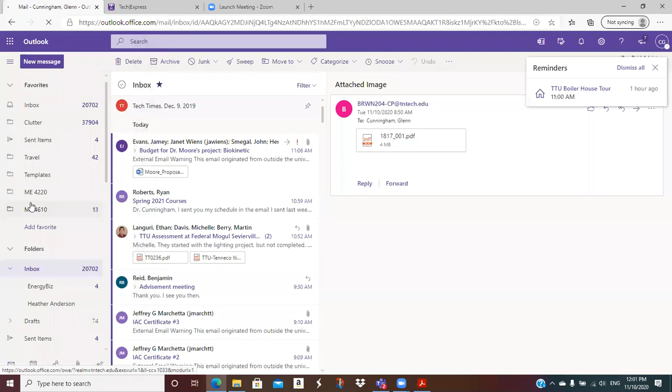You guys need to be working that homework, and I had a question whether I want it turned in. I think you probably should email me a solution file on that. I'll probably give everybody 100 that does a reasonable job. I mean, I've sent you the solution, so come on, how hard can it be? Just so I know you've touched it a little bit and looked at it.

I don't know, I'll take some feedback. I would think maybe the 19th might be a pretty good day for the pump test. It gives you a little bit of time to look at it. I mean, we could do the 17th. Does anybody have any strong preferences? Well, the longer you wait, the more you forget.

But I don't really care. I would say 17th or 19th is when we need to take that pump test. I like the 19th. Give me more time to study for it. Put it off later.

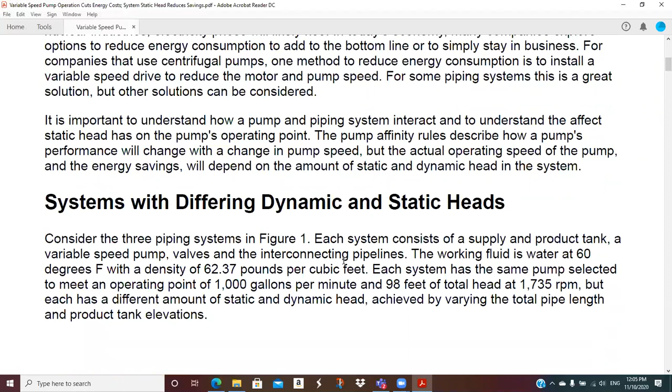But you have to incorporate the system curve to get a correct result.

He's got 3 piping systems here, figure 1. Each system consists of a supply and product tank, a variable speed pump, valves, and interconnecting pipelines. Working fluid is standard water, density 62.37 pounds per cubic foot. Each system has the same pump selected to meet an operating point of 1,000 GPM at 98 feet of total head at 1735 RPM.

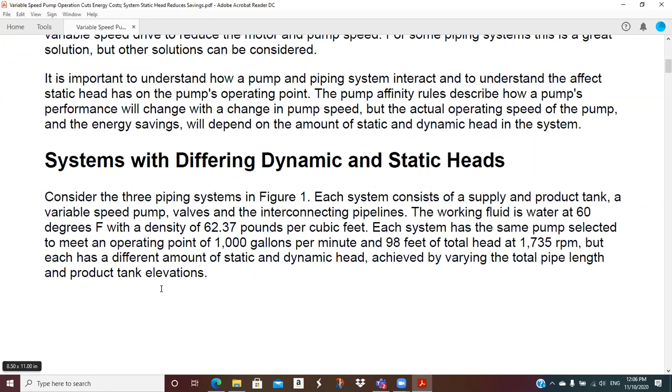But each has a different amount of static and dynamic head, achieved by varying the total pipe length and product tank elevations. So he's going to change the elevation of the tanks to adjust the static head and see the impact. I think we've kind of done this, but it's good to revisit.

System 1, system 2, system 3. System 1 is all frictional, that's all dynamic head, no static, all friction. You achieve that by having these 2 tanks that are exactly the same elevation and the same level, and no gas, same gas overpressure, which probably means they're just open to atmosphere.

So we see supply tank 1, level 20 feet, elevation 0. Product tank 1, level 20 feet, elevation 0. So VFD 1, 1,000 GPM, total developed head, TDH some people call it, 98.56, at 1735 RPM. So that's with a VFD probably on 60 hertz.

And the supply pressure is 3.271 PSIG, and the discharge pressure is 45.94. Let me get my calculator.

Just for the heck of it, if you take 45.94 minus 3.271, you get 42.669. If you multiply that by 2.31, you get 98.56. So see, that's the total head, it's just pressure.

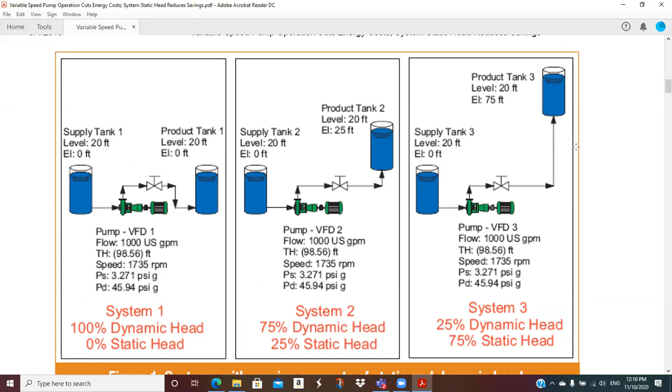That represents, of the head produced by the pump in system 2, it's roughly 25% static, because our static head is 25 divided by the total head of almost 99. That's roughly 25%, which means the rest of it has to be frictional head.

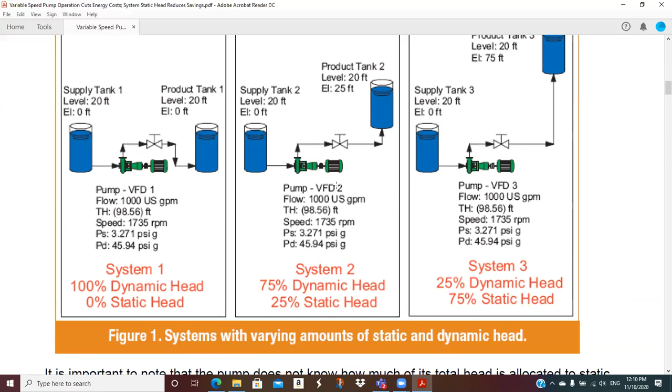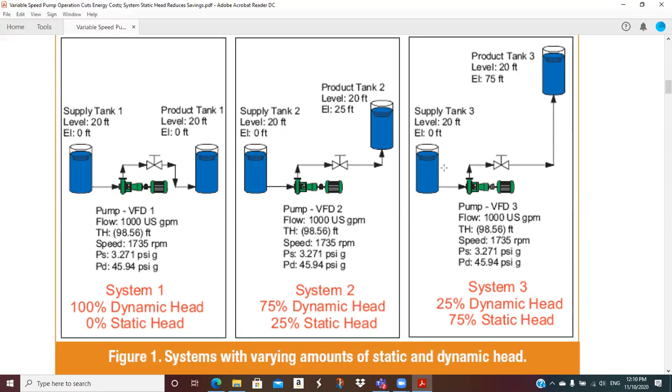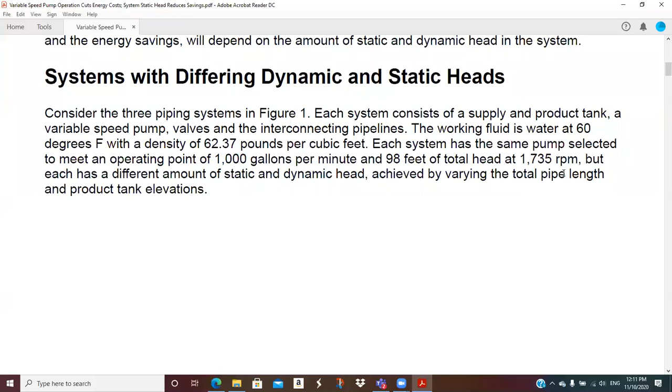And then in the third case, we've got this tank 75 feet in the air, and the levels are both 20 feet. So we say that this is 75% static and 25% dynamic head, still producing the same total head for the system. Remember, he's changing some of the pipe sizes, achieved by varying the total pipe length and product elevation, so there's some piping length changes.

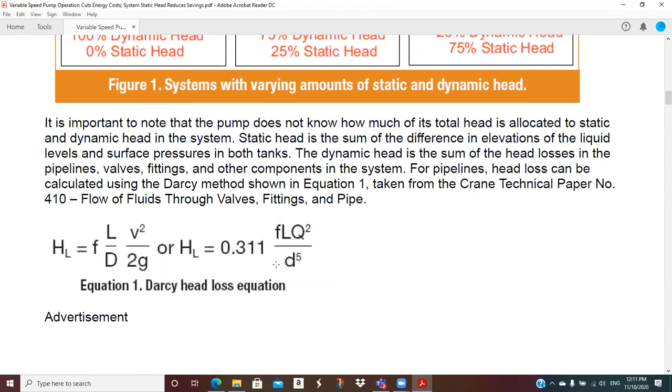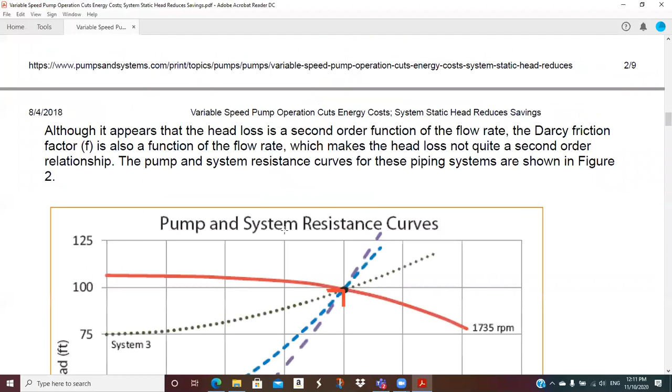Okay, let me make this a little smaller.

So when we plot it up, we've seen this kind of thing before. You got system 1, system 2, system 3, from 0 static to not much friction and a lot of static in between those systems. I think everybody should be good with looking at those curves.

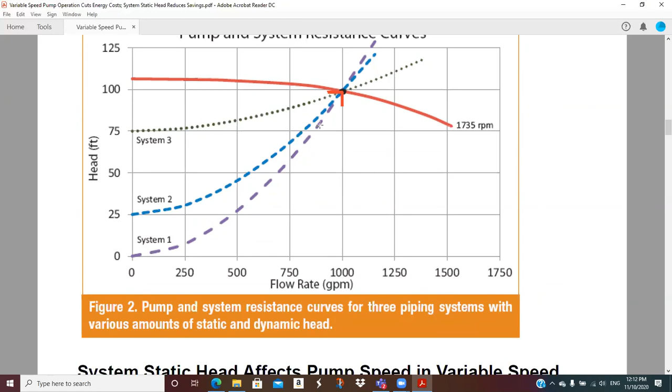Also, system static head affects pump speed in variable speed applications. So these are the affinity laws, and we know we use those to simply adjust the pump curve for different operating speeds. And wherever they cross, if you slow that pump curve, it's going to fall down through here. These three systems are going to operate at the intersection of that system curve and that pump curve at different speeds.

So using the affinity rules to reduce the flow rate by 50%, this just shows how you do it. Remember, this is the affinity law. So this would tell you, he says, okay, he wants to cut the flow rate in half.

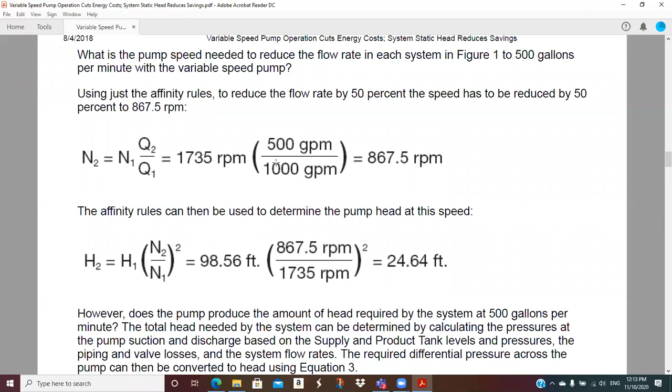If you want to take this point and translate it to the 50% flow from 1,000, then you can do the math like this. So then the RPM would be half of that, and the head then would be 24.64, okay?

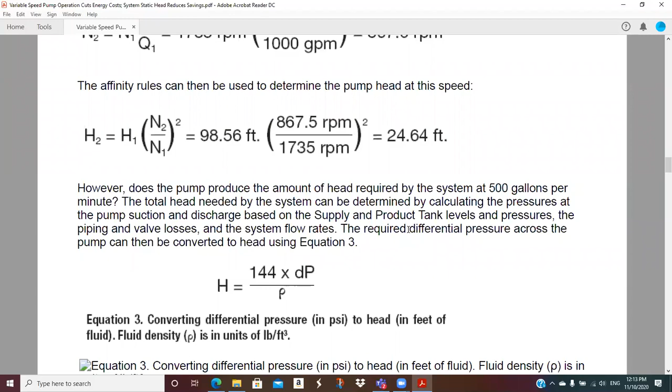So, it's been a little while since I've looked at this. Okay, so now we're going to show the three systems again.

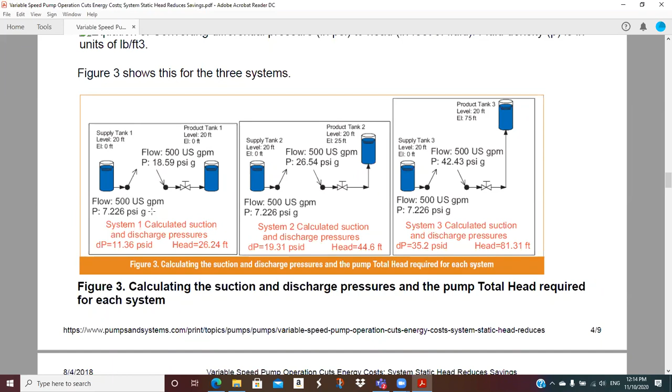So what are we doing here? Flow 500 GPM, so we've got a pressure of 18.59. And on this side, we've got 7.226. So calculated suction and discharge pressures give a head of 26.

Okay, for this system, basically he's saying, for these systems at 50% flow, what would they require? Well, at 50% flow, one of them is going to require here, the second one's here, and the third one is going to require clear up here.

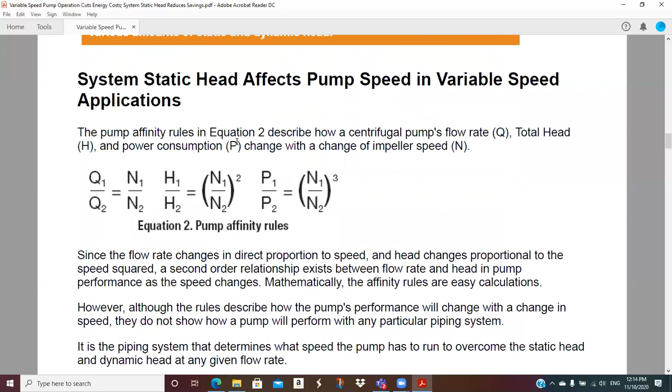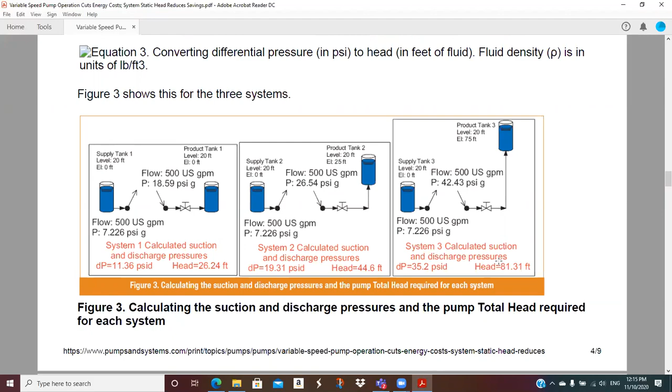So number 2 is going to require almost 45 feet of head, and number 3 is going to require almost 81 feet of head. Okay, and so you can't just blindly cut this speed in half

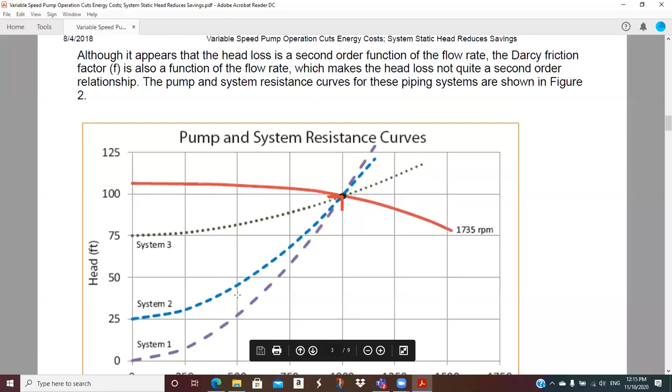and expect that that's where all three of these systems are going to operate. If I cut this speed in half, this curve is going to shrink down through here, and it's going to go through roughly, well, this point shrunk down to about 25 feet of head. So the all frictional system is going to work pretty much. So that curve is going to be way down here.

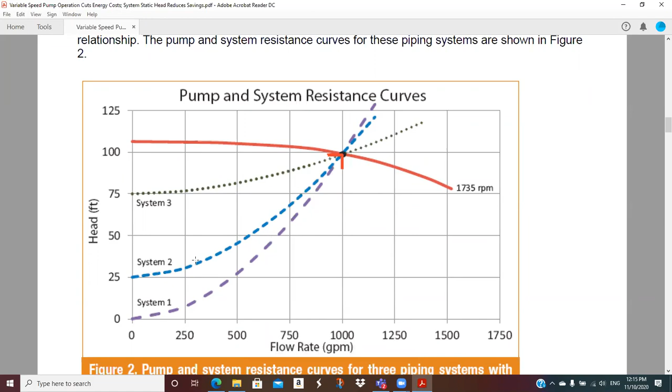With 50% speed, this system would produce flow back here someplace, and this system wouldn't produce any flow. That's what he's kind of trying to get to.

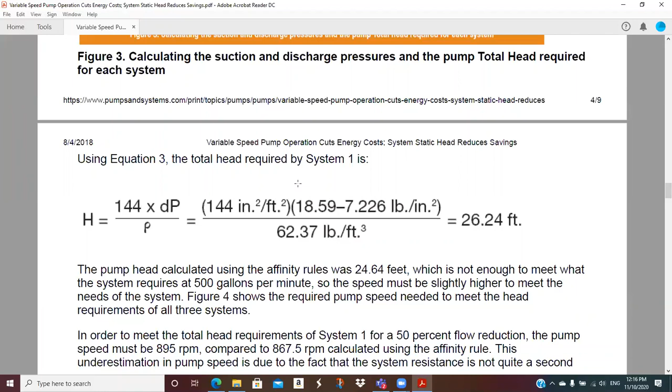Okay, calculating total head required. So this is showing he's just showing the calculation. This is 2.31 times the differential pressure, so 26 feet.

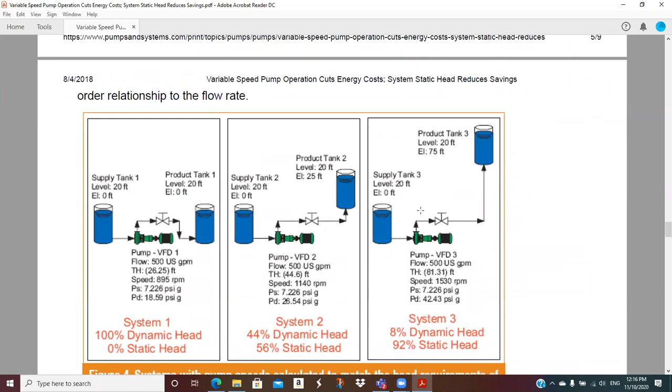Okay, system pump speeds calculated to match the head requirements of each system. Okay, so this guy, pump VFD speed, okay. So this one can operate at 895 and be on the curve.

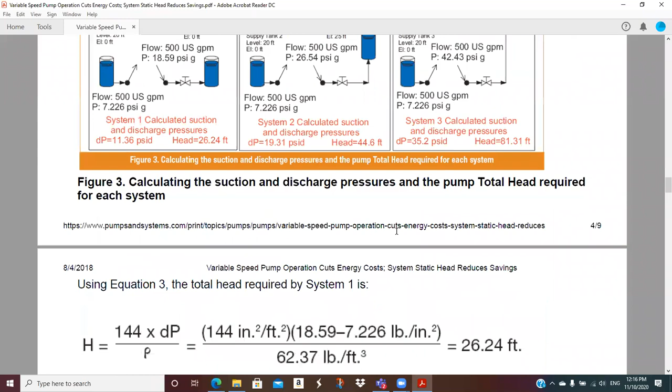So let's see up here, when we cut this speed in half, say this is 867, it's pretty close. 867 got us about 24.6 feet. Well, it's got to be a little faster because I need 26.25 feet. So we had to speed it up a little bit for system one, but it's pretty close. So the all frictional follows the speed relation pretty well.

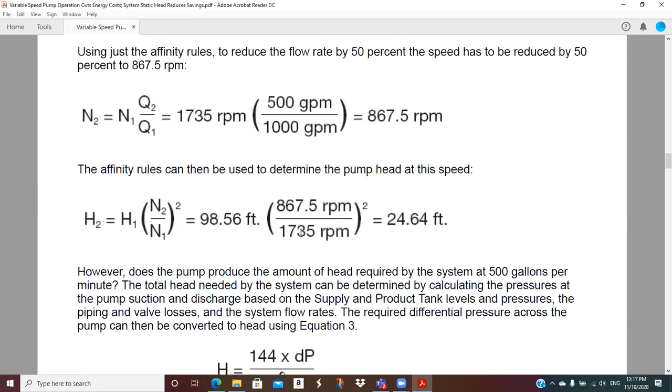For this system, at this operating point, we're 56% static and 44% dynamic. We need a speed of 1140 RPM, we put the pump curve through this point. That's what we're doing. He's calculated the RPM required to put the pump curve through this point because he wants 50% flow.

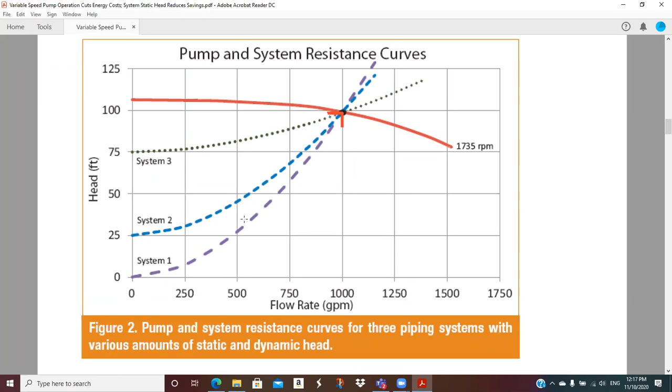And so this one's going to be up in the 80s, so it's not going to get slowed down very much at all. 1530 RPM in order to get us the 81.31 feet of head that system requires at 500 GPM.

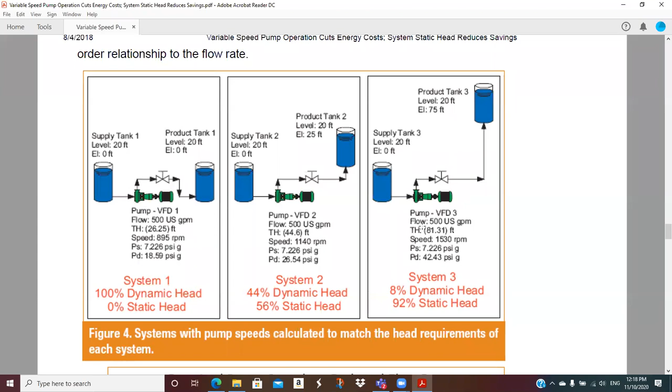So there you go. There's his analysis. And so what you do is you plot these system curves, you get in Excel, and you figure out what flow you want, and then you can do it trial and error. You just put in the different RPMs, and this curve jumps.

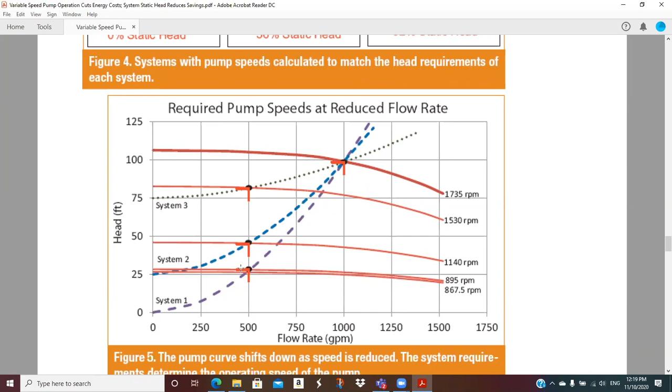And notice the affinity law, if I just translate the points to 50% speed, I get this curve. And so that curve really doesn't go through any one of the 3 points. And that's the point of the article, is you can't just use the affinity laws.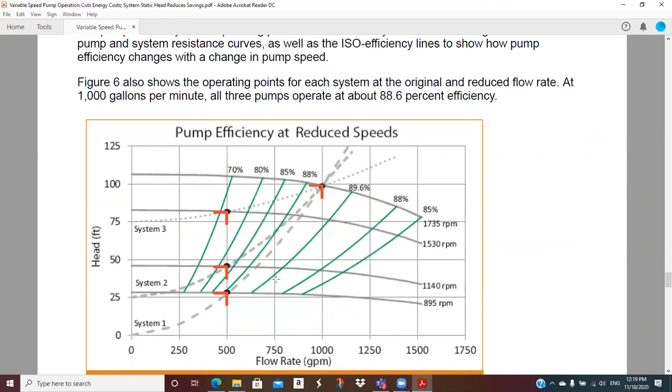And so then the other thing you have to, if you want to calculate the operating cost, you have to determine, well, what's the pump efficiency going to be at the reduced speed? And so you can see for different RPMs, different efficiencies.

So you're over here at like 89% efficiency, but with this static system, when I slow this thing down, I'm going to be just a little over 70, so maybe 73, 74% efficient. When I do it on this second curve,

I'm going to be better, about 83%. And on the all frictional curve, it's pretty much the same. I'm going to be 88, 89%. So that has to be taken into consideration.

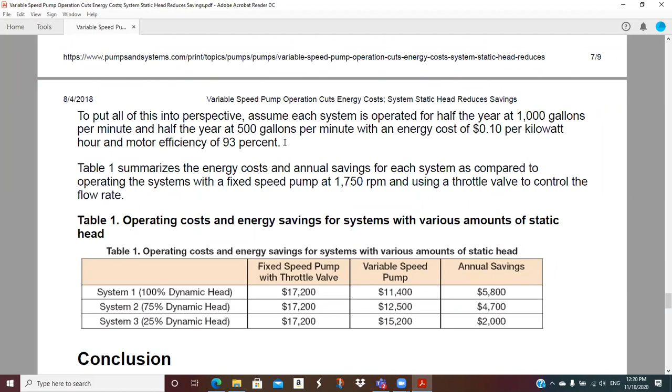So let's see, operating costs vary with different amounts of static head. Fixed speed pump with throttle valve.

So for system one, variable speed, annual savings. If instead of using speed control I just throttled the flow on the all-frictional system, it would cost the same, $17,200. With variable speed operation, it would drop to $11,400. Savings of $5,800 for putting in a variable speed drive.

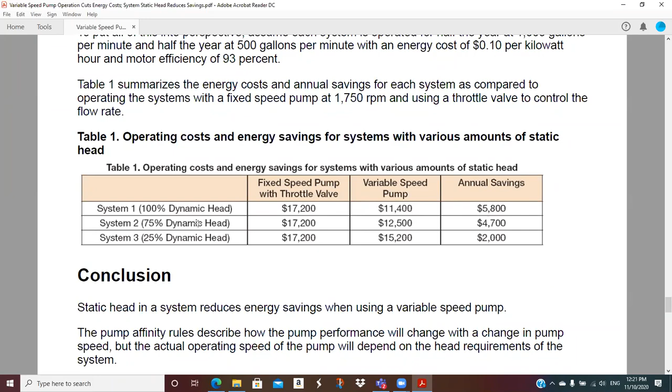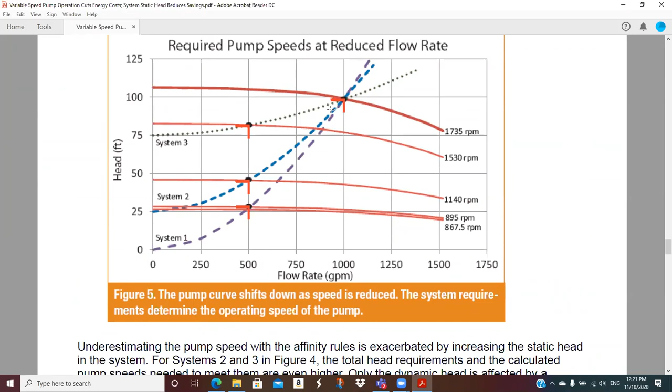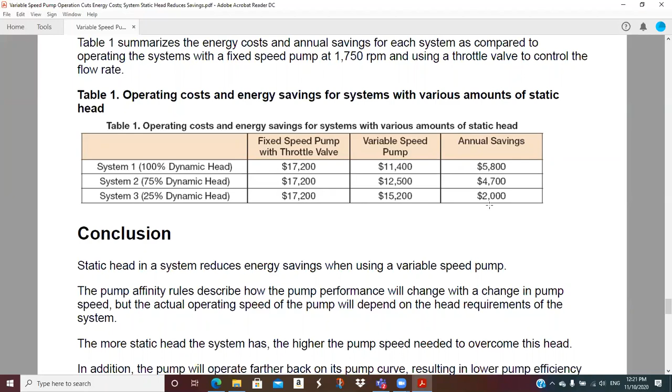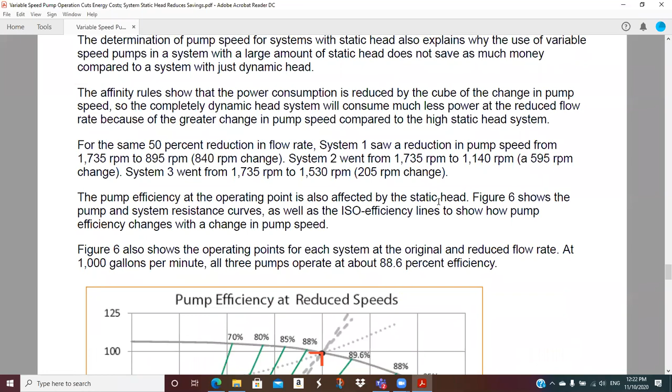If you had the second system with 75% dynamic head, you would only save $4,700 because of the way the pump curve falls along that system curve. And for the final case, which was static dominated, we would only save $2,000. So the conclusion is, you've got to pay attention to your static head if you're looking at a pumping project to reduce energy by going to speed control on a pump.

Okay, well that was a little rough. I hadn't looked at that article in a while, but I think we got through most of it there. So, questions? Y'all kind of get the gist of it. It's a pretty clearly written article, so I will probably draw some test questions out of this because I really like this article.

Okay, let me do one other thing here. So I sent Oak Ridge kind of a nasty gram the other day because I started to record a video

of me using the MEASUR tool to do a pump analysis. I don't know if you remember that really inefficient system at the end of the pump slides, the one that was 6,100 GPM. And then there was a recirculation line right downstream on the pump discharge, and then there was a throttling valve. So I was going to redo that analysis in MEASUR, and I'll tell you, you just about can't do it.

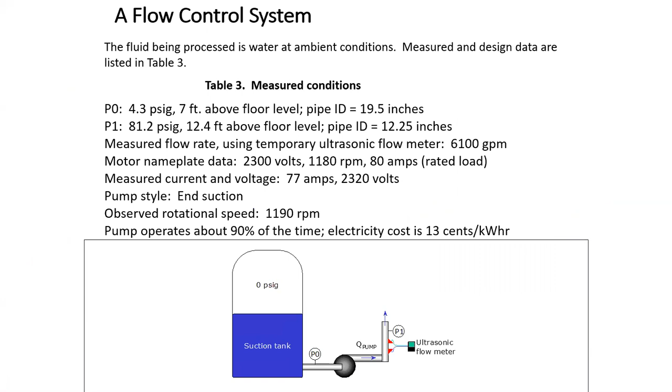Let me see, where did I put it, pumping files for Tina. So Tina's a lady that is one of the programmers, she's a mechanical engineer. So I just sent her these slides, and it's got, we went through all this in great detail, it's got the pump head calculations, the PSAT analysis, all this sort of thing.

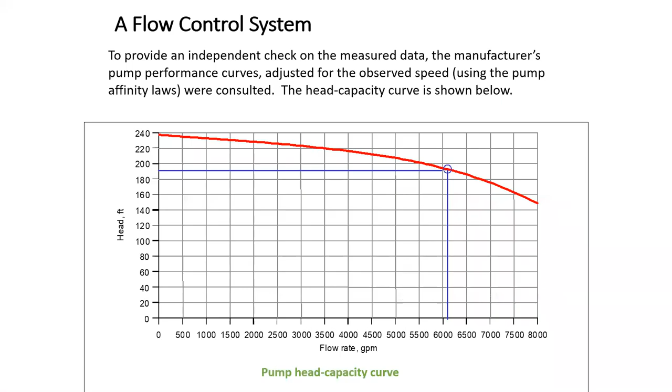So you start trying to do this in MEASUR, and it's virtually impossible. I'd say it's totally impossible.

Let's see, I think I probably have... yeah, this is it right here. Okay, so system setup, this is MEASUR. And it tries to do the right thing.

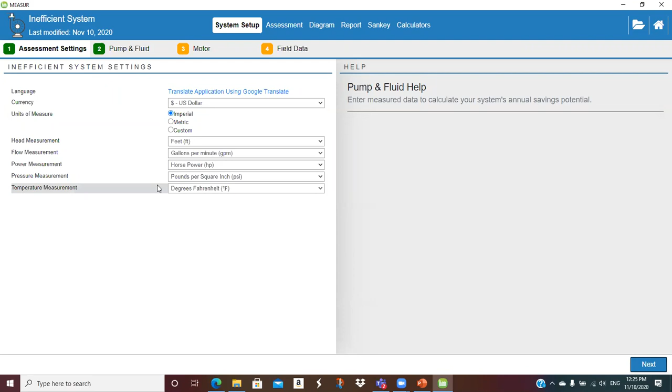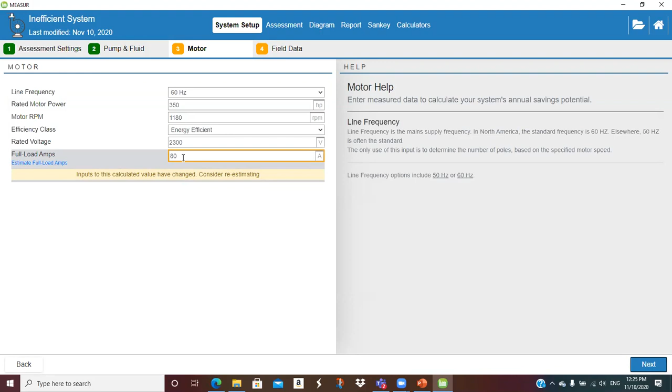But just units, pump and fluid. So I put in the type of pump, I put in the RPM, direct drive, water, all this is good. Put in the motor information, 60 hertz, 350, energy efficient, all that. It didn't really like the, we had a list at 80 full load amps, it doesn't really like that value, but it'll take it. So that's not an issue.

Then you get your field data. And this is what, now it does make a comment that it doesn't think you can get 6,100 gallons out of this type of pump. I don't know, I didn't make this example. If this is one that was in the field, then obviously that's incorrect, but that's neither here nor there. So there, we calculated pump head as we had before. So that's fine, it's about 193 feet. I think it was 193.5 or something before, but that's okay.

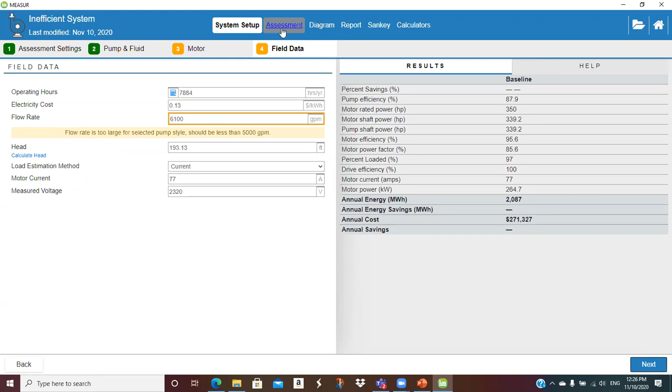Measured current and voltage, so these numbers are okay. And you go, okay, well if you recall, the first thing we wanted to do is change the flow rate to 3160, because the rest of the flow was recirculating back to the suction tank. So I said, okay, let me do my assessment here, let me see. Scenario, required flow, 3160.

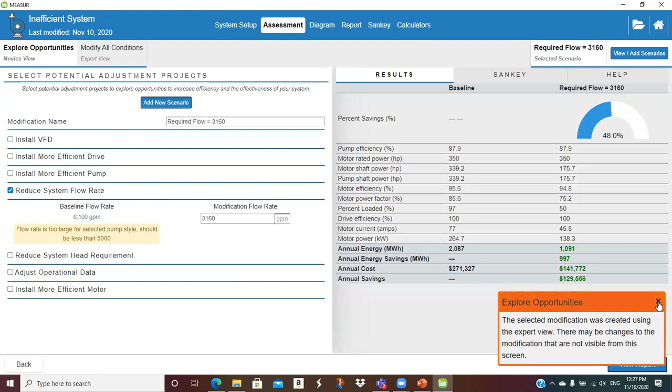Well, and so if you do, this is really not install VFD, this was just to reduce the flow rate, right, to 3160. And here's the analysis. And this shows a savings, by just reducing the flow rate, of $130,000.

Now there's no savings. This is incorrect. And if you look at the PSAT result, let me just make this one bigger.

There you go. So this is the initial analysis, $271,300, agrees perfectly. Copy it over here, change the flow, and this is the result.

Well, it's still $271,300, right? Because I didn't change the motor amps, and I didn't change the voltage. And look, my pump efficiency is 45.4% because I'm still using the same power, and now I'm only really pushing 3160 GPM that I'm actually using. The rest of it's just going around in a circle.

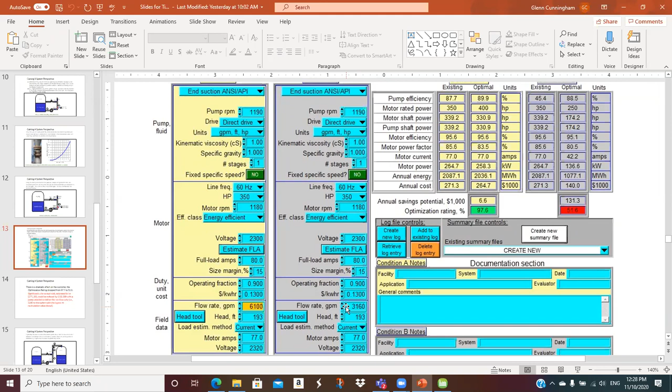Okay, well look what MEASUR does. MEASUR forces me to keep the pump efficiency the same. I can't change it.

The only input, I could change the pump head, but I don't want to change the pump head. I could adjust the operational data, that's the cost of electricity and the number of hours per year, but I don't want to do that. I can install a more efficient motor, but I don't want to do that either. It's already got an energy efficient motor. I got nowhere to go there.

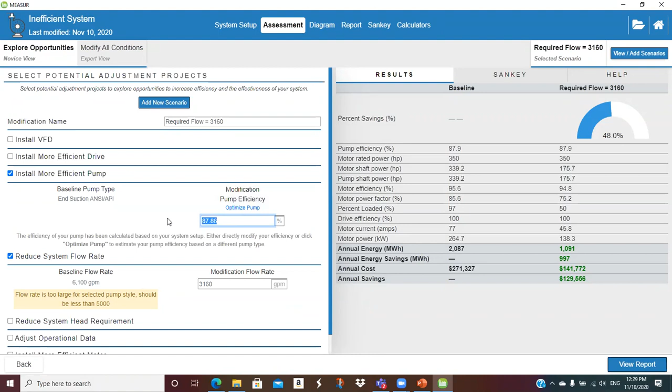Install a more efficient pump. Well, let me see, I didn't try this. I guess I could put, can I put 45 on this? But see, that means I'm going to have to go do hand calculations to know what efficiency to put in here. Or I guess I can run it in PSAT, 45.4, and then I can go to MEASUR. But if I'm going to run it in PSAT, what do I need MEASUR for?

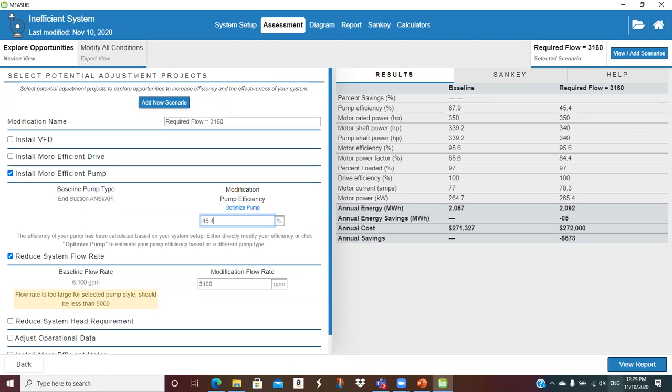That's ridiculous. These people have spent God knows how long. More efficient drive, okay, I can put a belt drive on it.

I can install a VFD. Okay, so if I click the install VFD, it does give me an efficiency box, but again, I have to go calculate it. What's the point?

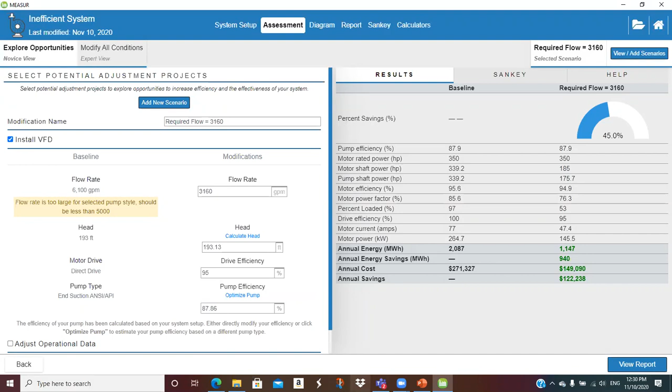Now, if you're running the project exactly the way they want you to run it, then this will probably work. But the way this example is set up, you basically can't do this analysis. You can't repeat this analysis without doing hand calculations in MEASUR.

So anyway, I sent them a nasty gram and they haven't replied. I send them nasty grams all the time about their software.

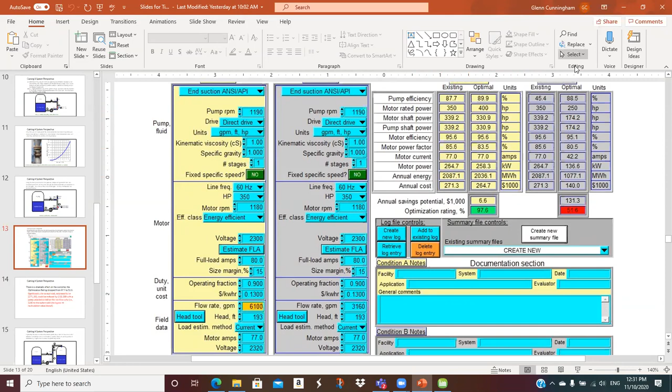But anyway, so my undying recommendation for you is download PSAT while you can, if you ever think you're going to need to do some pumping analysis, because this thing is flipping pretty good. It puts it all right there in front of you.

All right, I'll get off my soapbox now. Quit pounding DOE. Somebody needs to.

Okay, let's see. Compressed air.

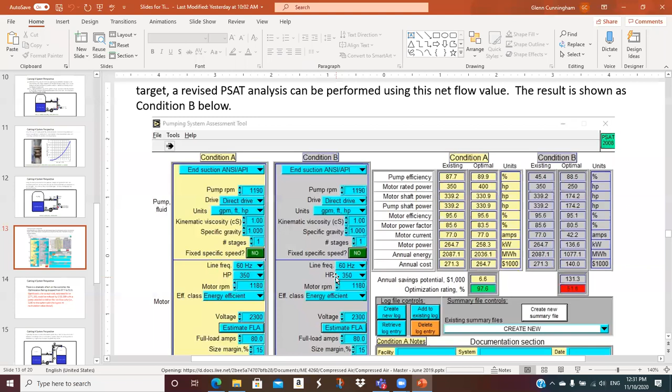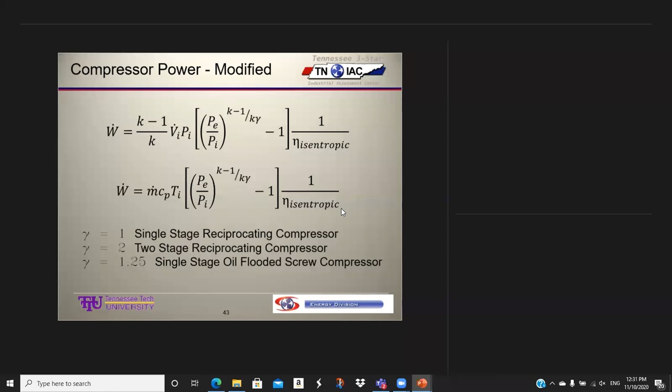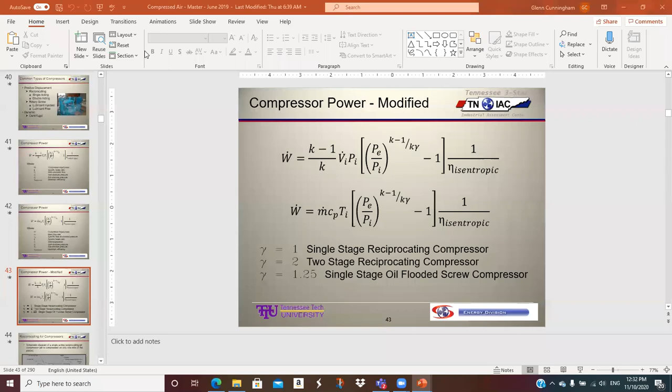Okay, is this where we finished? I'm sorry, I can't hear you. Speak up. 39, 39, thank you. Thank you, dear. You got to get rid of that nice voice around me. You can't be. It takes people a while to learn they can't be nice with me.

Okay, oh yes, compressed air generation. I remember now. Okay, well great topic. So, common compressor types.

Positive displacement. What's that mean, positive displacement? It takes a volume of air and it squeezes it by reducing the volume, like a piston cylinder, like a rotary screw. Okay, those are our two primary types.

And then dynamic, that means that's like a fan. That's a really high-speed, high-pressure fan. Suckers turn 40 to 60,000 RPM. Can you imagine building a rotor that's going to spin at 60,000 RPM? What if you nicked a little piece of material off of that?

It'd probably tear itself apart. And those machines, they all have vibration sensors on them. But these centrifugal machines really have vibration sensors on them because they're afraid if something goes wrong at those speeds, this thing will shake itself to pieces in a hurry. So anyway, but that's the dynamic. It has more characteristics of a fan than positive displacement.

So there's a big difference in some of the operating characteristics that we'll see if we're talking about positive displacement or centrifugal. Centrifugal tend to be very large machines. They're very good machines, they're expensive machines. And the old Cooper Cameron and some of those things, you find them out there 30, 35 years old, still running. Because maybe they knew how to build a compressor.

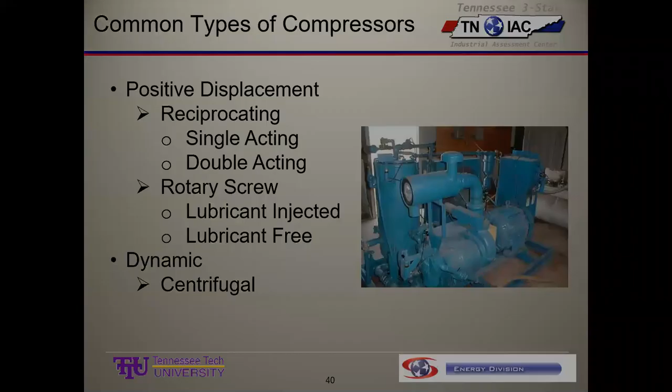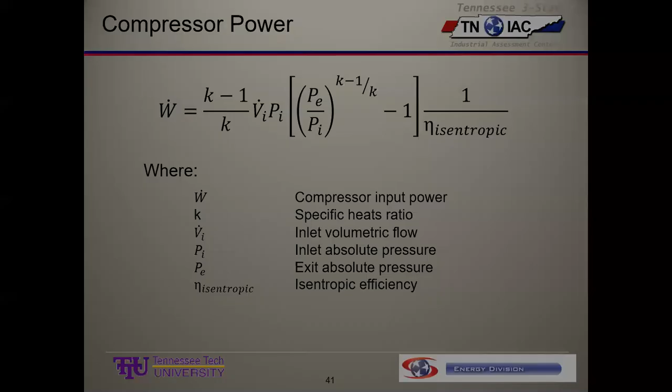Because one of the complications on a centrifugal is it's like a fan. If I reduce the discharge pressure on it, I get more airflow. The power doesn't necessarily go down much, but I get more airflow. The question is, when I get that additional airflow, am I going to use it productively? When we get into the control modes on the centrifugal, one mode is blow off, where you actually take compressed air and blow it through the roof because you're making more than your system needs. So if I'm in blow off and I reduce this pressure, I get a little more air and blow it through the roof -- how much do I save? Nothing. So you just have to be real careful with centrifugals. We'll talk more about that.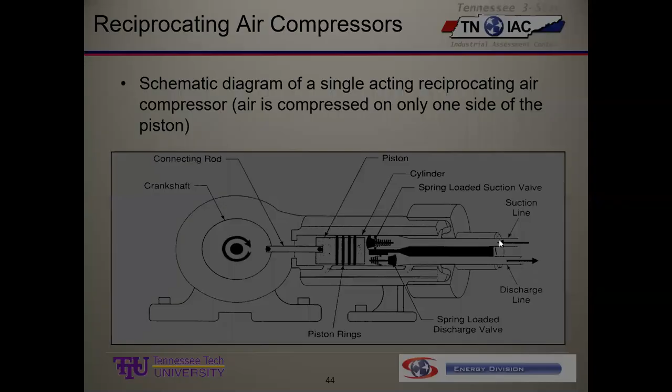Okay, so we've got some little characteristics on each one of these. Single acting, reciprocating, you see the inlet and then the outlet valves. So we just compress on one side. You can get one stage or two stage, so you can get a two stage single acting.

They're usually air cooled, most of them small. If you go to Lowe's, even these days you can buy a small recip compressor, but a lot of the automotive shops buy ones with a couple of pistons on them and a big storage tank, for $500 to $1,000, and you set them in the shop and turn them on. They just have a pressure band. They pump up to say 110, then unload, and coast down to 100, and come on and off based on how much air is being taken out of the system.

The start-stop control is a very efficient control mechanism. That's actually pretty good, and a good point-of-use compressor to lower main system pressure in large plants.

So we also sometimes see a large plant that has one or two small to medium-sized uses that require a much higher pressure than everything else. Maybe you have a couple processes or pieces of machinery that require 125 PSI, but you may be running 10,000 horsepower of compressors. If this is a small use, you'd hate to have all those compressors pumping up to 125, which would cost you an arm and a leg. So maybe you set those at 90 and put in a small point-of-use compressor, and take some 90 PSI air and boost it up to 125 or 130 with one of these, just supplying that machine with the pressure it needs.

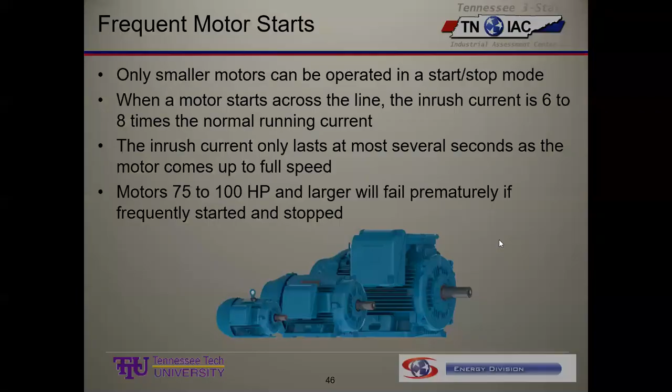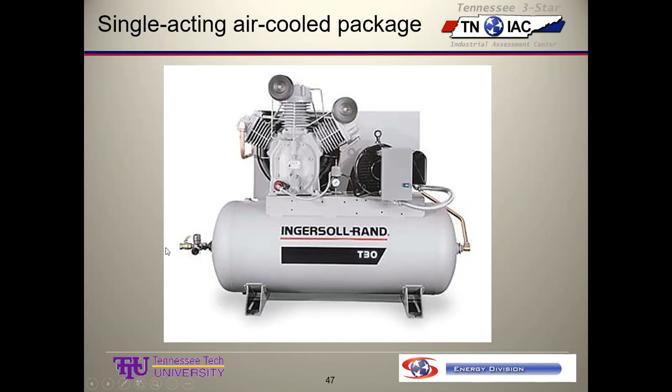And a small storage tank, and then you hook in here to take the air out and use it for pneumatic tools or whatever you're doing with it.

Okay, double acting recips. These were pretty big boys too. I've seen a few at maybe 400 or 500 horsepower, but most were 800, 1,000, 1,500, 2,000 horsepower. These were pretty big machines. They don't make them anymore, though there still are some in operation. But you can't talk about compressed air without talking about double acting recips.

So they compress on both sides of the pistons. Say you've got a suction valve here and a suction valve here. If it's pulling back to the right, you're sucking air in here and compressing over here, and here's your discharge valve. When the pressure gets to the set point, the valve pops open and the air rushes out. When you get this all the way over to the right, you have this side of the cylinder charged, ready to go, and then it goes the other direction. You compress on this side and suck in on the back side, and it just goes back and forth. That's what we mean by double acting recip.

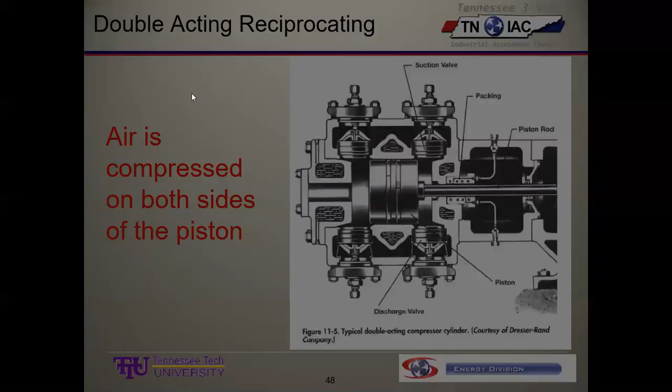There's a picture. So we had 4 cylinders on that guy, 2 on this side, 2 on the other side. We'd produce out of one side, then go to an intercooler to cool. You probably remember from thermo, you can enhance the efficiency of a compressor by doing intercooling - partial compression, then cool the gas off again, and finish the compression. So these things all had intercoolers on them, and you had one big motor turning all that.

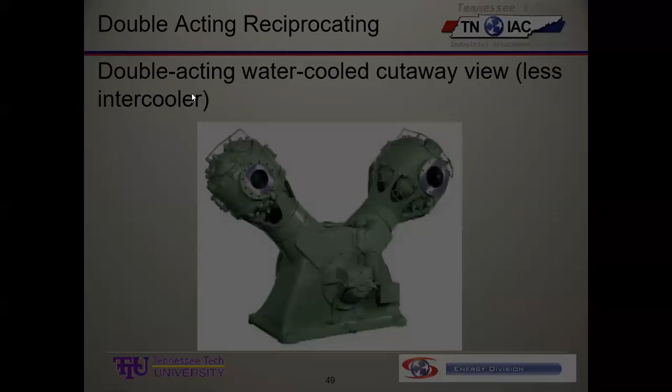So here's our summary slide on double acting recips. Uses pistons with compression on both sides, usually water cooled, greater than 10 horsepower - I've never seen a small one. 2-stage, capacity was very good, efficiency 15 to 16 kW per 100. That's a really good number, as you'll see. Our standard number on the screw machines is about 18 or 19, so this was considerably better.

They can go up to pretty high SCFMs, max pressure plus 250. They had lubricant and lubricant-free machines. I've never seen a lubricant-free one.

The lubricated machines required a major overhaul basically every 2 years. That's the equivalent of doing a major overhaul on your car engine, where you have to take it apart, change the rings, and all of that. And that's what really killed these things - they required quite a bit of maintenance.

Efficiency was good. The large companies in the old days had master mechanics, people who would rebuild their own machines like gearheads and guys that rebuild engines. I'd go to work and they'd rebuild the double acting reciprocating air compressors, no problem. But that skill is pretty much retired, and they can't find people. So you have to go to the compressed air companies, and they charge an arm and a leg to rebuild these things. And that's done a lot.

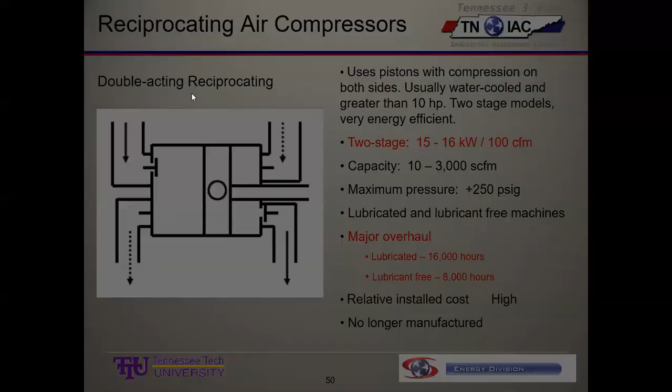Okay, so now we're going to get down to different ways to adjust capacity. On these double acting recips, let's say this thing can produce 3,000 CFM, but I only need 1,500 CFM. So physically, what's going to happen at the machine is it's going to reduce the capacity. We have at least 4 options, and we'll see that the efficiency of operation at part load changes radically depending on which technology we use.

Part load efficiency is a big deal because air compressors spend their whole life, most of them or a lot of them, operating at part load. So how efficiently are they when they're producing 60% or 70% or 50% or 40% of their rated flow? So we've got bypass to suction.

So basically, on the discharge side, we have this little valve, and we can open this valve, and it lets the air run around. The air that we just compressed, to say 100 pounds per square inch, it lets it run right around and go back into the suction. Doesn't really sound like a very good idea, right? But that's what bypass to suction is.

I've got suction throttling. This is like a throttling valve, and if I don't want any air out of this side, I simply close that valve and don't let it draw any air in. So it still moves back and forth, but I just don't let it have access to any air, and if it can't get any air in, it can't get any air out.

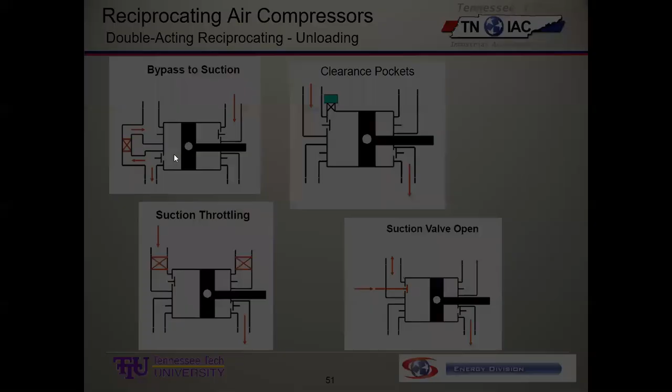But the question becomes, if I'm making 75%, 50%, 25%, what happens to my percent full load power? Well, bypass to suction, man, I'm going to compress that air no matter what, and then I'm just going to let it pass around here. So guess what? That's as bad as it gets. So if you ever had a compressor operating bypass to suction, you would want to change it immediately, or keep it fully loaded all the time, because it's going to use 100% power no matter how much air you're taking out to the system. That is not a very good deal for the plant. Whoever's paying the power bill is not going to like that.

Okay, then we have suction throttling, which is just trying to restrict the airflow in over here on the inlets, and it unloads along this curve. So I would say at 50% compressed air production, what is that? I'm at 87.5% power at 50% flow. Ooh, that's not very good either. It's better than bypass to suction, but it's not very good. It pretty well sucks. No compressed air puns intended.

Okay, well, so I've got these others. Several of these have pretty much the same characteristic, and my clearance pockets operate here. That clearance pocket is either open or shut, and so on these, I have the ability to run 100%, 75%, 50%, 25, or 0. So if I open all 4 of the clearance pockets, then I produce no air effectively to the system, but I would still pull 20% power. So if that's a 1,000 horsepower motor, you're still paying for 200 horsepower and getting no air. But as we'll see, in the realm of compressed air, that's considered good. That's how inefficient compressed air is.

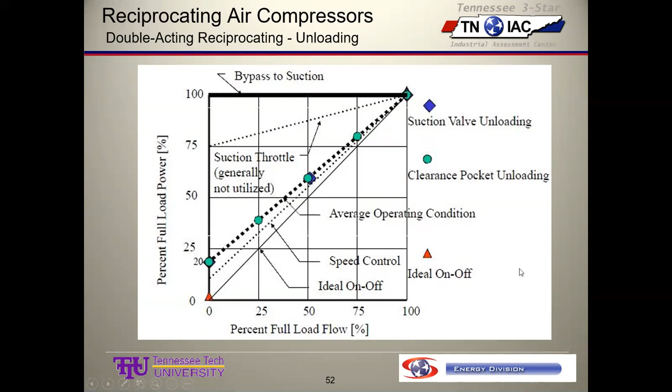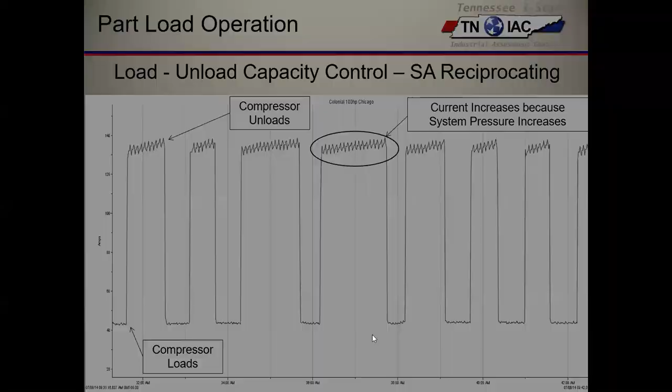Other thing we can do is determine how much air that compressor is producing. Think about it, when it's loaded, it's producing whatever its rated airflow is, pretty close. So 100 horse is probably 450 or so CFM, between 400 and 500.

So for this period from here to here, do you measure at the top, do you measure here? I don't know, halfway in between, whatever, it's approximate anyway. But if you count these little lines, each one is a second on this thing. You can count them, or the software has some tools that will tell you what that is. So this thing was loaded about 36 seconds.

So to make the number round, let's say it's producing 500 CFM for 36 seconds, and then it was unloaded for 36 seconds and didn't produce anything. So for that 72-second period, what was its rate of air production? Well, it's 500 divided by 2 because it was loaded for 50% of the time and unloaded for 50% of the time. Its maximum rate of air production is 500, so on average, for that cycle, it produced 250 CFM.